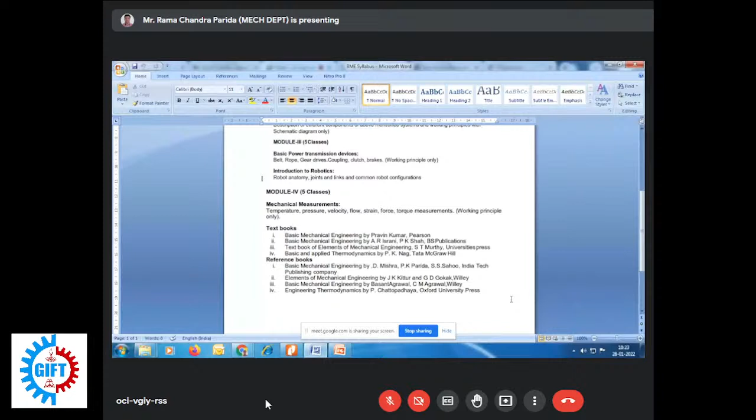Okay, you can see here. सर वहीं तक हम डाल देंगे क्वेश्चन क्या।

तो आपका सिलेबस रहेगा क्लास टेस्ट 1 के लिए मॉड्यूल 1 से लेके मॉड्यूल 3 के एंड तक, यानी कि मॉड्यूल 1 से मॉड्यूल 3।

All questions are of multiple choice type, and for your information, let me clear that you will get at least 40% of the question from quiz and surprise in your class test 1.

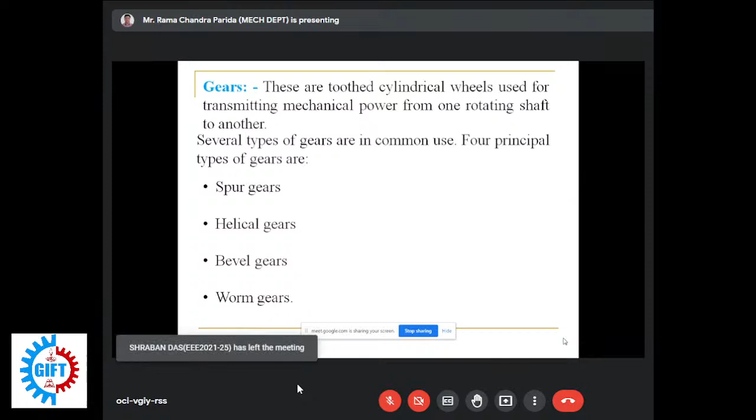Gear is a toothed cylindrical wheel used for transmitting mechanical power from one shaft to another, and several types of gears are there. I repeatedly told you, remember all these gears: spur gear, helical gear, bevel gear, and worm gear. This is actually one gear.

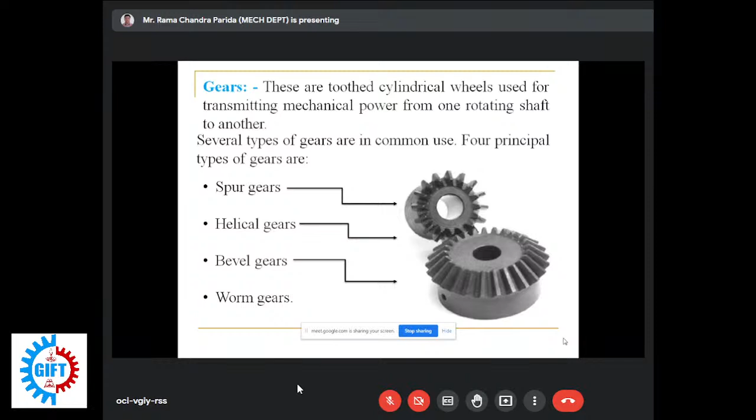Here you can see what spur gear looks like, as already discussed. Able to identify it or not? Yes, sir. This is how helical gear looks. And this is your bevel gear. Able to find it? Shafts are not parallel. And this is worm gear.

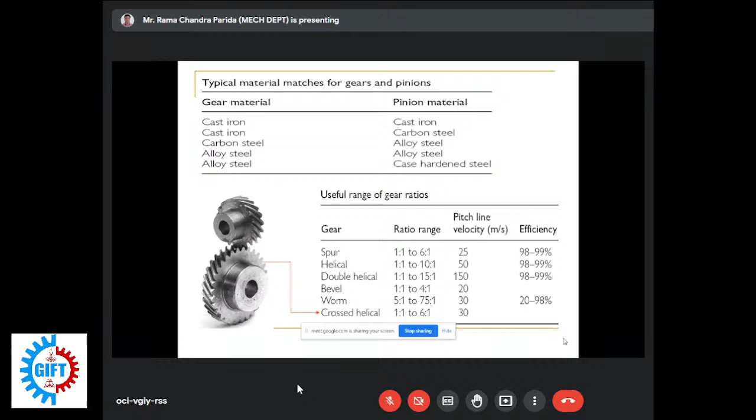So basically the gear material, the gear is made up of cast iron or alloy steel.

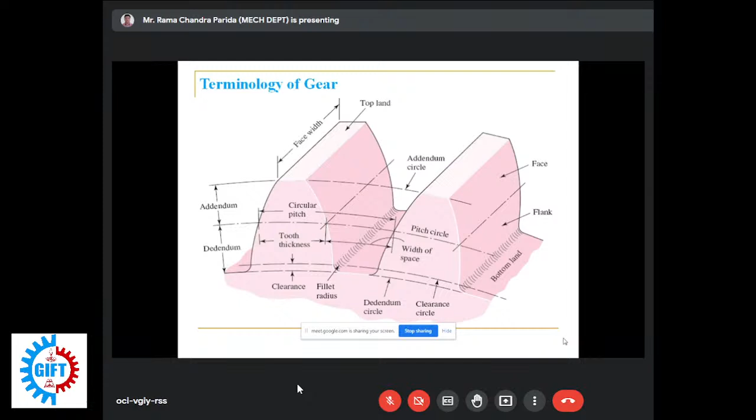This is the terminology of gear we have discussed in the previous class: what is pitch, circle diameter or circular pitch, what is diametrical pitch, what is module, what is top land or face width, and what is space width. Already discussed, no need to repeat.

This is the pitch circle diameter. Circular pitch, as defined earlier, is pi d by n, pi by p, or pi m.

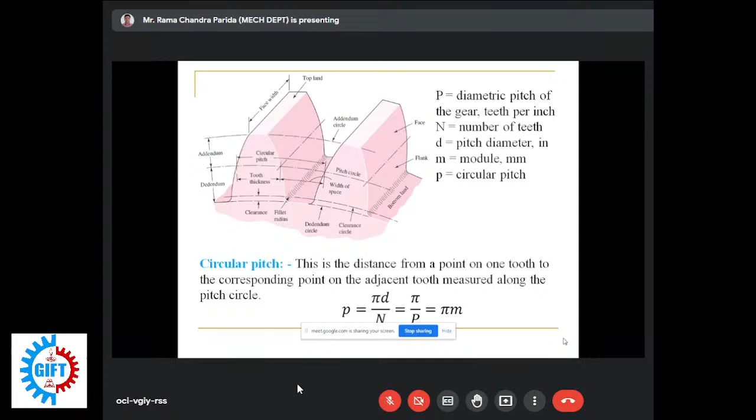This is already over, so I just want to cover these things we have to discuss today. What is a gear train?

Sometimes two or more gears are made to mesh with each other to transmit power from one shaft to other, and such a combination is called a gear train or train of toothed wheels. So gear train is when two or more gears are meshed with each other to transmit power from one shaft to other, it is called a gear train.

Nature of the train used depends upon the velocity ratio required and the relative position of the axis of the shaft. Suppose you are deciding which gear you have to put in your train, so it depends upon how much velocity ratio you require, and also what is the relative position of the shaft.

Types of gear train - you must remember this, it is very important, I have to cover it. These are the types of gear train: one is simple gear train, compound gear train, reverted gear train, and epicyclic gear train.

So what is the difference between all four types? In the first three types of gear train, the axis of the shaft over which gears are mounted are fixed relative to each other. But in case of epicyclic gear train, the axis of the shaft on which the gears are mounted may move relative to the fixed axis.

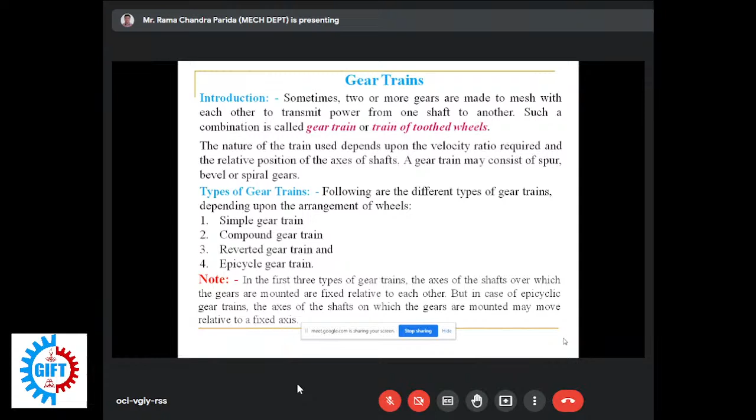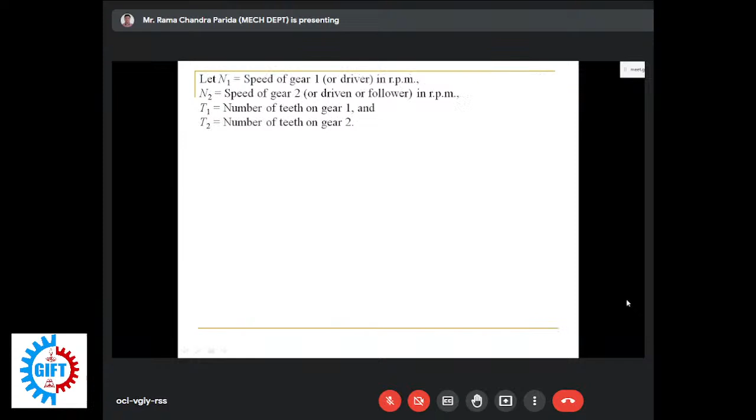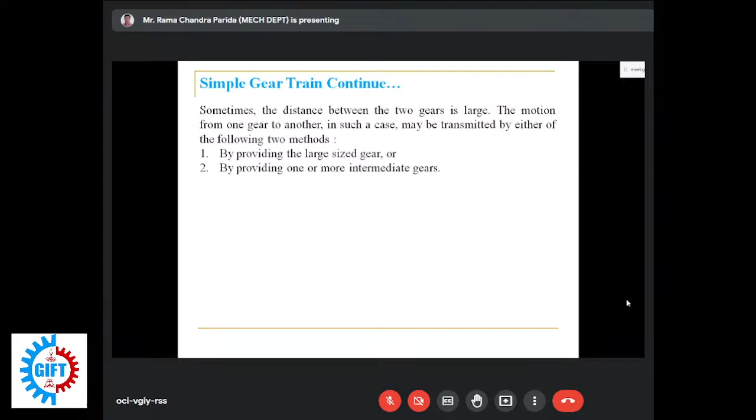Okay, but what we follow, we will discuss. So when power is transmitted from one gear to another, when both are present at a large distance, only two methods exist: by providing a large sized gear, or by providing one or more intermediate gear.

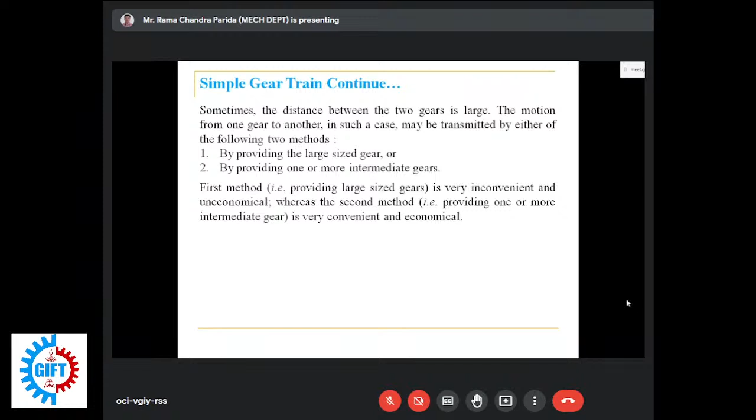So suppose you think this type of arrangement can be done by providing a large sized gear, but it is very inconvenient and uneconomical. You have to make a large sized gear, which is not convenient. Whereas the second method, providing one or more intermediate gears, is very common, convenient and economical. So wherever you find power transmission between gears at a larger distance, whether in industry or local shops, it is better to provide an intermediate gear than a large sized gear.

Note: when the number of intermediate gears is odd, the motion of both the driver and the driven gear look the same. When the number of intermediate gears is even, the motion of the driven or follower will be opposite to the direction of the driver. You can see, just go back to that previous slide.

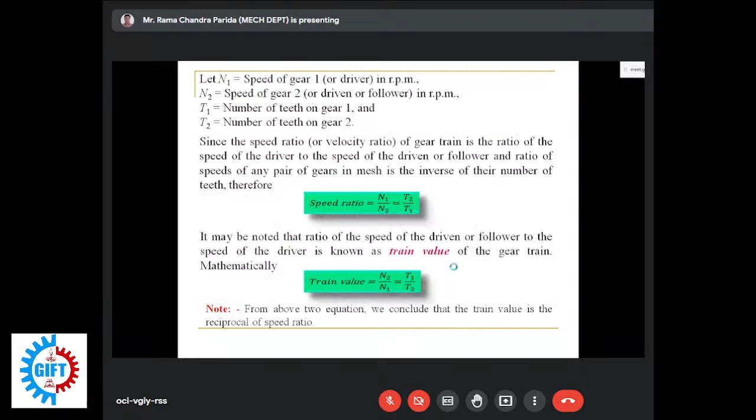Are you able to see this slide or not? Are all of you able to see it? Yes, sir. Yes, sir. Yeah.

So concentrate on figure B. When we provide one intermediate gear between a driver and a driven gear, what do you find here? Both the driver and the driven rotate in the same direction. Yes or no?

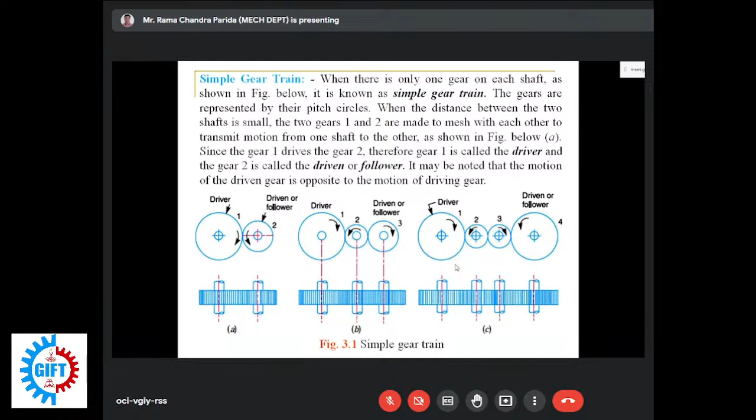And when there is an even number of intermediate gears, what do you find? The driver and the driven are rotating in opposite direction. Yes or no? This is the thing you have to mark.

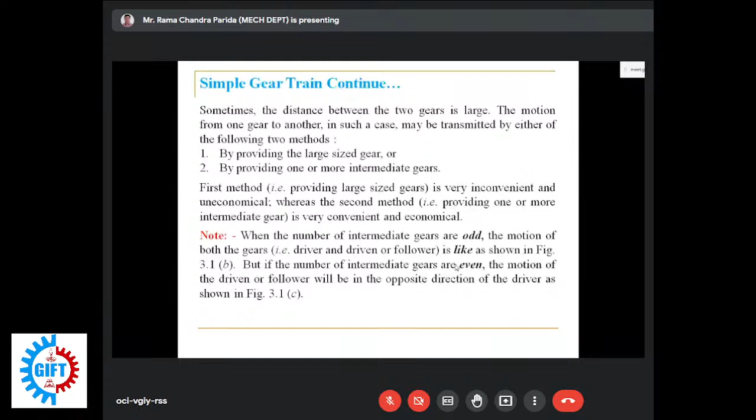So these are the things you have to remember related to simple gear train. Now if we consider a simple gear train with one intermediate gear, as shown in figure 3.1b, let N1 be the speed of the driver, N3 be the speed of the driven gear in RPM, and T1, T2, T3 be the corresponding number of teeth on each gear.

Since gear 1 is in mesh with gear 2, we can write the speed ratio as N1 by N2 equal to T2 by T1. Can we write it or not?

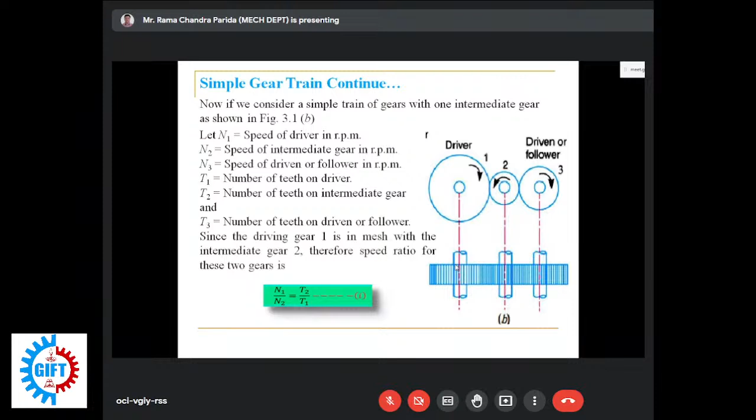As gear 1 and gear 2 are in contact with each other, similarly gear 2 and gear 3 are also in contact with each other.

So if we rewrite the same speed ratio for gear 2 and 3, we can also write N2 by N3 is equal to T3 by T2.

So now in the next step, what I have to do is combine the speed ratio of the gear train. First you take two gears, 1 and 2, then you take 2 and 3. So both 1, 2 and 3 constitute your gear train, yes or no?

So now we are calculating the speed ratio for the gear train. Speed ratio of the gear train as shown in figure is obtained by multiplying equation 1 and 2, for gear 1 and 2. After multiplication you can see N1 by N2 into N2 by N3 is equal to T2 by T1 into T3 by T2.

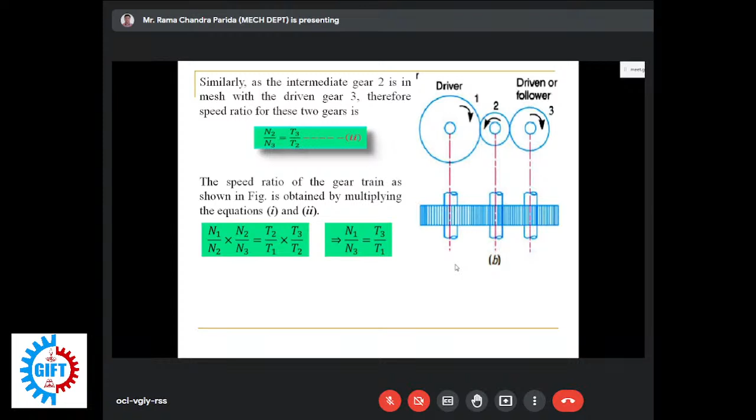Can we cancel the T2 and N2 from each side? Yes, so after cancelling that term, N2 from left hand side and T2 from right hand side.

That means you can calculate speed of the driver divided by speed of the driven is equal to number of teeth on driven divided by number of teeth on driver.

The same way, suppose you have to transmit power through not a very large distance. If it is a large distance through which we need power to transmit, we have to use a belt drive. So when the distance between two shafts is shorter, we are using a gear drive.

So that gear drive, if we put one or two idle gears, it will not affect the final expression of that speed ratio. I can conclude it, or not?

So if a situation demands, we can also insert 2 to 3 intermediate gears.

Am I correct? Move to the next slide.

That is called the train value, which is just the reverse of that speed ratio. So in the same way, you can rewrite it. Similarly, it can be proved that the above equation holds good if there are any number of intermediate gears.

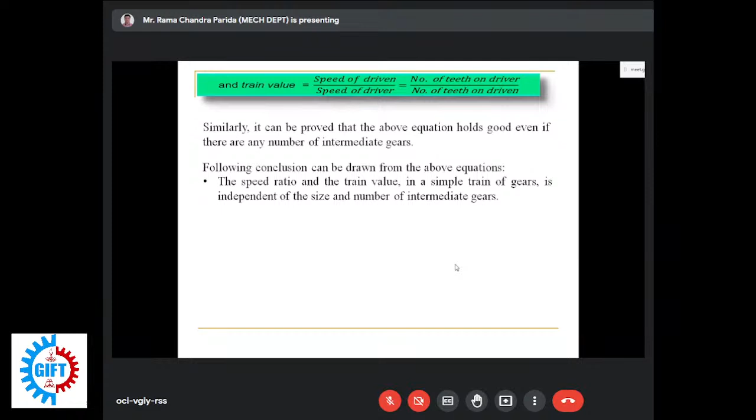Next, the second conclusion you can see here: these intermediate gears are called idle gears.

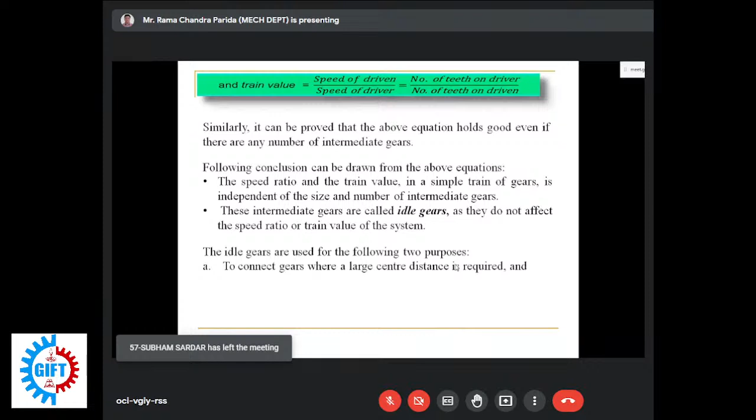To connect gears when a large centre distance is required. And second purpose of providing an intermediate gear or idle gear is to obtain the desired direction of motion of the driven gear, clockwise or anti-clockwise.

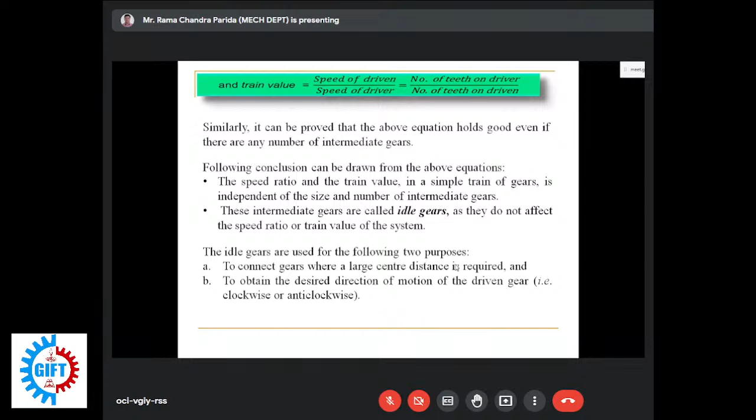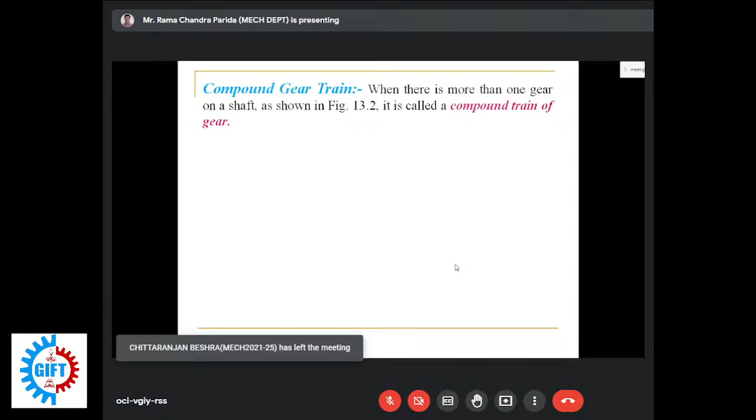So compound gear train, what is it? वही सिंपल एंड कंपाउंड है हमारे सिलेबस में। So when there is more than one gear on a shaft, as shown in figure, it is called a compound gear train. You can see here, this is the figure I will show you. So in the previous section, in simple gear train, what we found,

the idle gears in a simple gear train do not affect the speed ratio. However, these gears are useful in bridging the gap between driver and driven. Okay, so that's why we used idle gears.

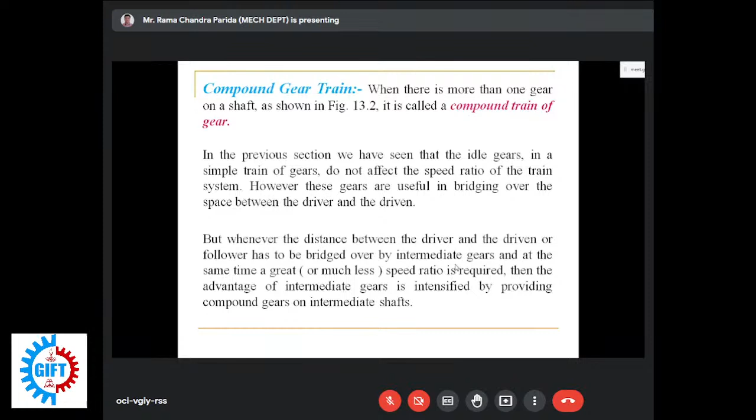So here you can see, on an intermediate shaft we have to insert two gears rigidly fixed to it so that they may have the same speed. One of these two gears meshes with driver and other with driven. So come to the figure here, you can see.

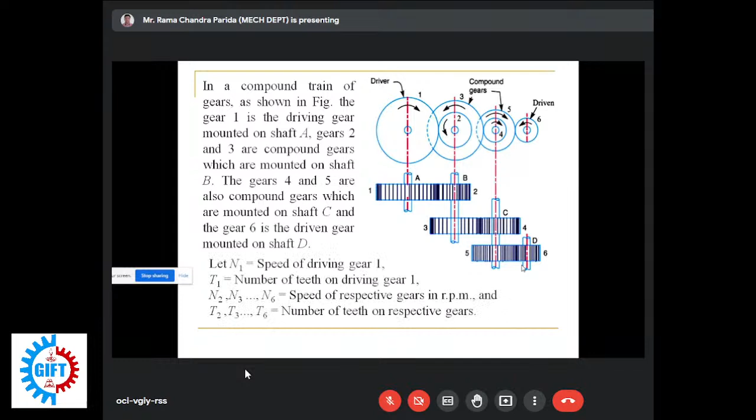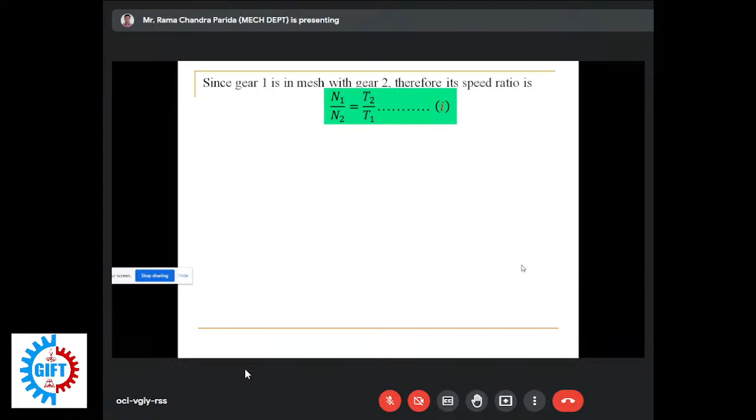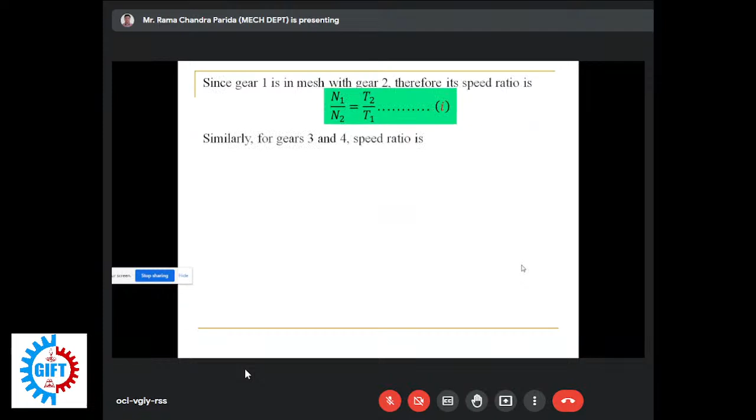So speed of gear 2 equals speed of gear 3, and similarly gear 4 equals gear 5. We are doing the same thing, putting it in the expression. So finally we get N1/N6 equals T2 into T4 into T6 divided by T1, T3, T5.